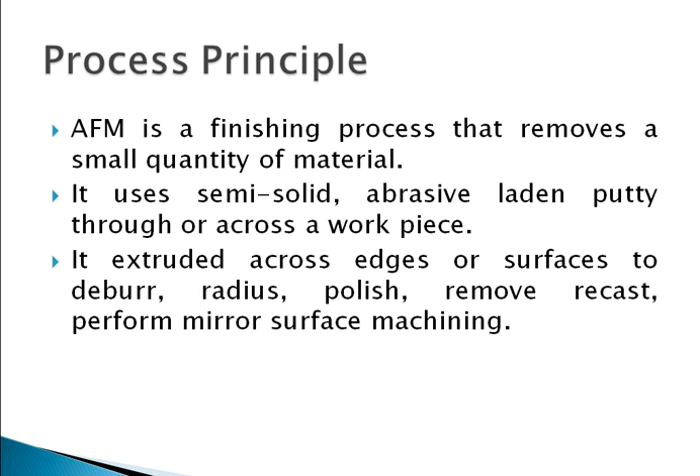A hydraulic ram forces the abrasive medium through the workpiece. As the abrasive medium flows through the part, its velocity will change with the different cross-section areas. Due to its low MRR, it is not suited for mass removal. It is used for finishing metals, ceramics, and many plastics in a uniform and economic manner.

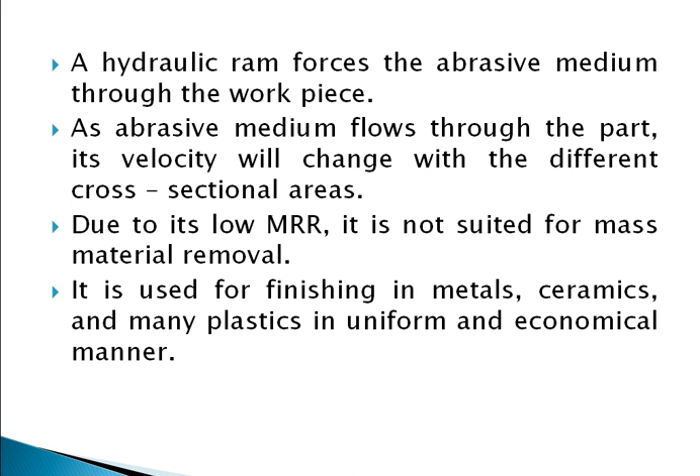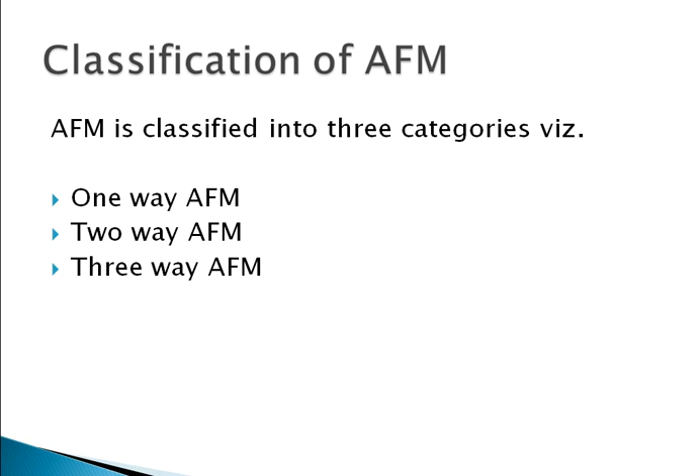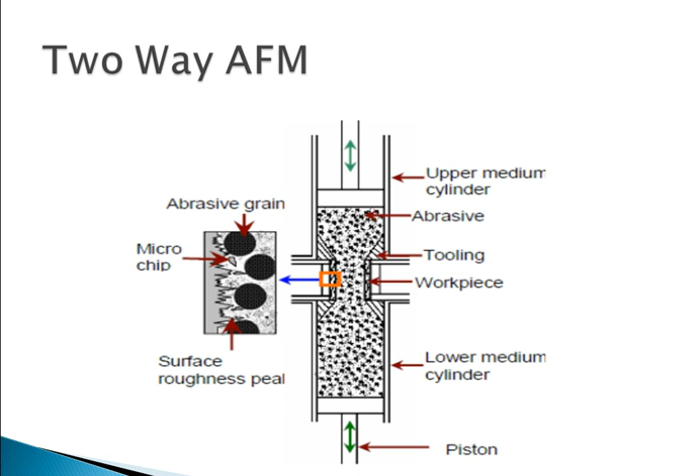The equipment used in AFM is constructed with two opposing medium chambers that are hydraulically or manually clamped together. The pressure used here for extruding the medium is in the range of 0.69 to 22 megapascal, that is 100 to 3200 psi. Lower pressure is preferred for fragile parts or loose fixtures. Little heat is also generated due to friction. Hence, medium coolant is recommended.

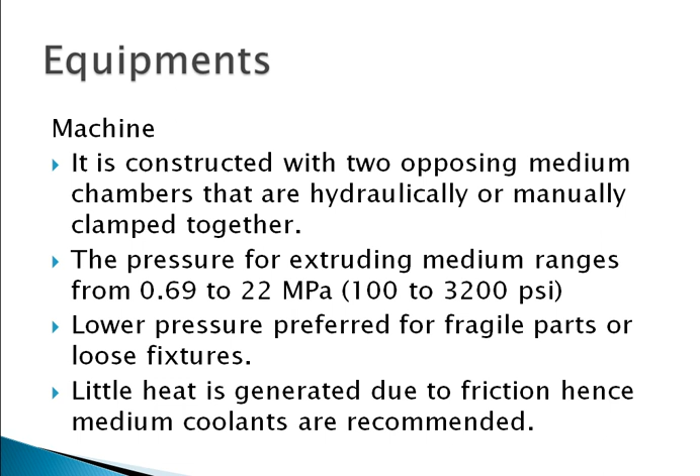Tooling is used only to hold the part or parts in position, and to contain and direct the flow of abrasive. Any number of parallel restrictions can be processed with uniform results. Replaceable inserts made of nylon, Teflon, or hardened steel are used and can last up to thousands of parts.

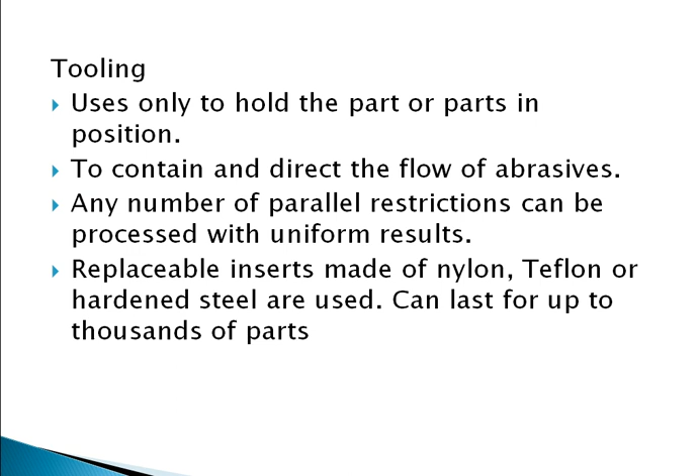The medium used in AFM is a pliable medium that is resilient enough to act as a self-forming grinding stone. Media contain a base and typically two or three abrasive grit sizes. The base contains an organic polymer, especially hydrocarbon gel. It determines the degree of stiffness. Four types of abrasive are commonly used, that is aluminum oxide, silicon carbide, boron carbide, and diamond. The size of abrasive particles is in the range of 7 to 700 mesh.

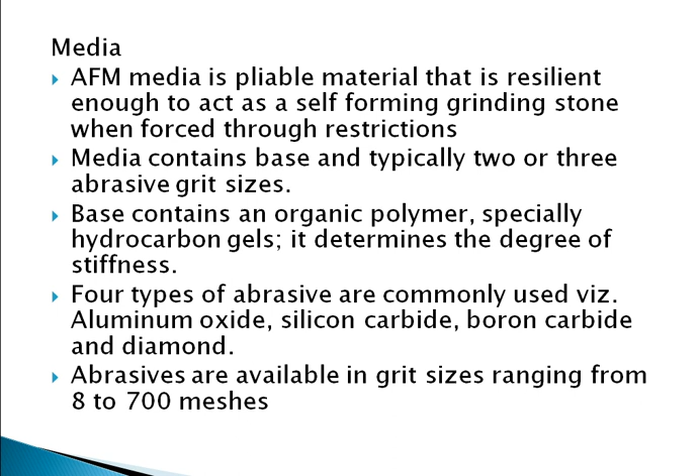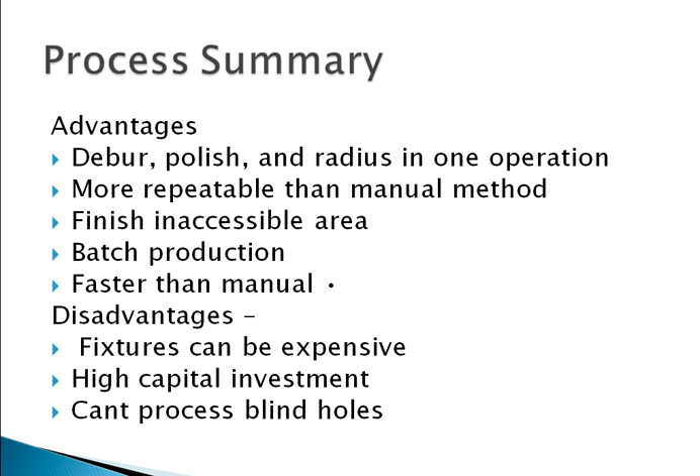The following are advantages of AFM: deburr, polish and radius in one operation, more repeatable than manual methods, finishes inaccessible areas, batch production can be done using AFM, and it is faster than manual methods. It has some disadvantages also. The fixtures used are expensive, high capital investment, and it can't process blind holes.